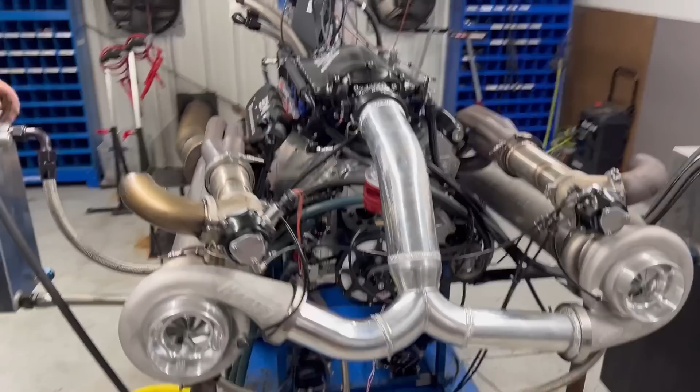We are here with a pretty decent, in fact probably as good an LS engine as we're gonna do, and as you're pretty much gonna find when it's water jacketed, cast block, cast cylinder head, so cast aluminum. Kyle is working on this thing and he's done the hot side, cold side for this. So we're going to use this as our SML setup and big horsepower LS setups.

This particular engine is for Alex Szabo, and Alex has actually bought an SML from us too. So this is going to be like the starter engine for him, and then we're going to put the same system on for his SML as we get that thing all the way through the process.

So Kyle, why don't you tell us what we got going on here? Basically, like he said, cast block, cast head, nothing super fancy billet on it like it is on the SML that he ordered. But as far as LS stuff goes, it is pretty bad.

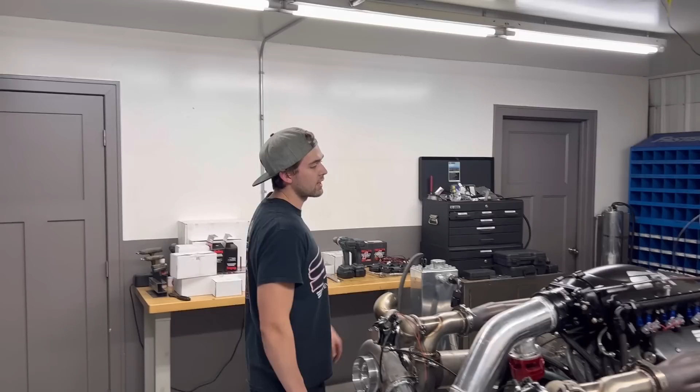So it's All Pro LS7 cylinder heads, LSR block, Callies crankshaft, all our super really bad boy go fast parts on it. Obviously billet intake, billet covers, and turbos, twin 76s I believe they are. Yeah, ball bearing, really nice turbos.

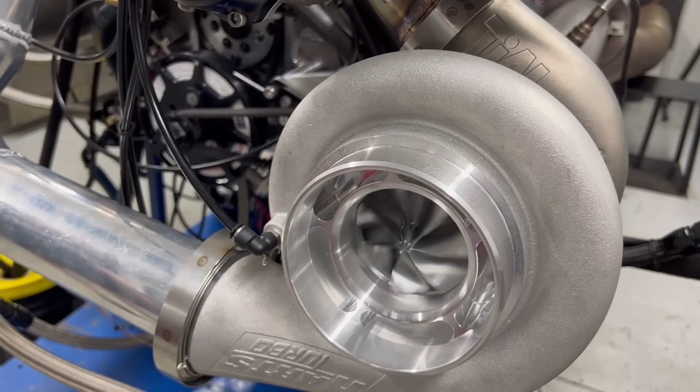This is kind of like, I think they make another super cheater version, like a super good version of this one. I don't think these are the super billet bad boy cheaters, just the medium cheaters.

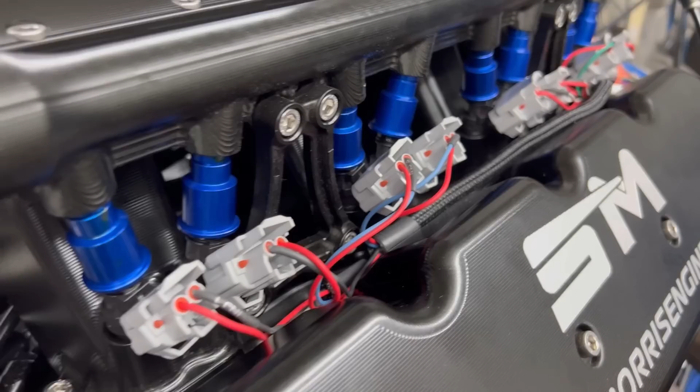Nice turbo anyways. So we're running it on a Holley Dominator today on the dyno, and I just did all our initial startup stuff with wiring, wiring up the second set of injectors, doing all our hot side, cold side stuff, hooked up all oil, all the fuel.

What kind of fuel is it on? Methanol. It's a methanol engine. But this will be a drag and drive type deal as it has water and everything like that, so he's going to do a little bit of street driving on this engine as well.

What kind of oil system is it? That's a Dailey billet dry sump, so you can't really see it unless you get right under there. So Dailey billet pan and oil pump setup.

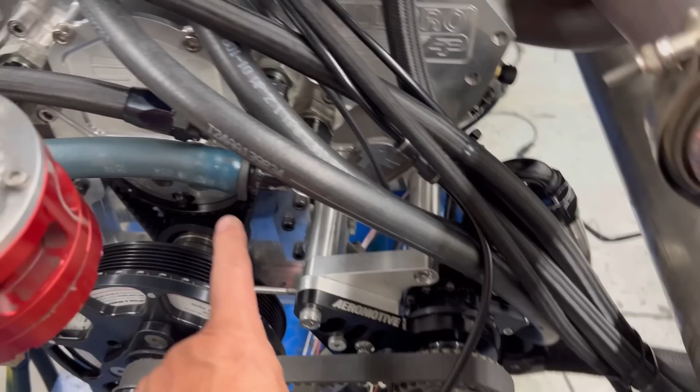And as you can see here, we also have our fuel pump drive, cam sync, and oil pump setup, which is going to be real similar, the same as what it is on our SML stuff. So drag and drive, you'll be able to just take the belt off of the fuel pump, run it through gasoline.

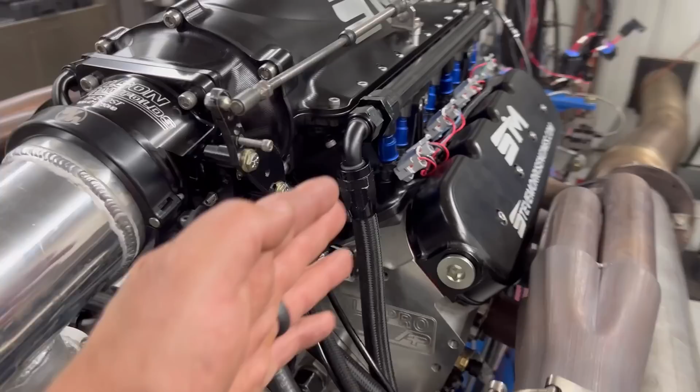Especially with this style injector, these are the 2150 FIC 2150s. Now on 90 psi fuel pressure, these things flow 300, I believe 295, 300 pounds per hour each. So ample for what we're going to be doing with this particular project.

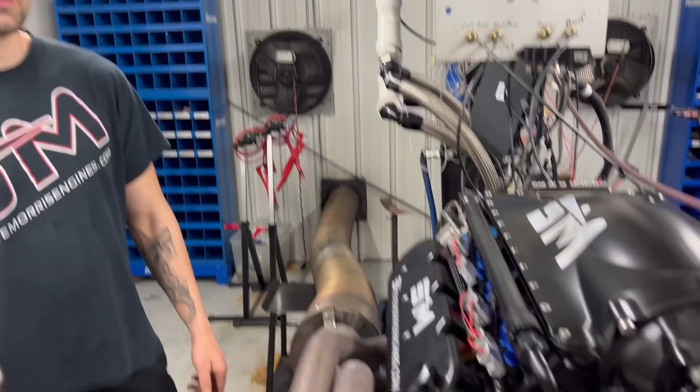Cylinder head, all pro LS7s, just usual Inconel valves, titanium valves. Titanium intake, Inconel exhaust. It's on an all pro 12-4 head, I believe these ones are. Jesel rocker system on this.

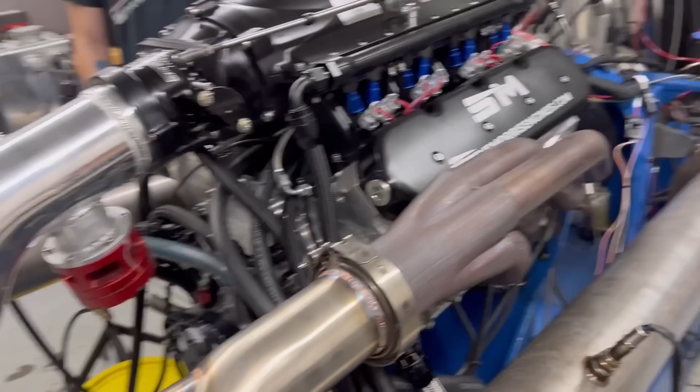Normal deal through there. These are, like I said, everything hot side, cold side is all ours, but these are Alex's turbos. Obviously you can see the Dailey dry sump, and that's the dry sump tank, that's just our dyno tank that we use here.

And oh, what else we got? Coil on plug. That is pretty much about it.

So Kyle's already run through the startup and warm up. Let's see here, and we can do... We actually have set up a temporary timing pointer so you could check timing on it. This still has, this is the crank trigger, so you're gonna have to check timing on it, because this is an external crank trigger, not using the internal crank trigger.

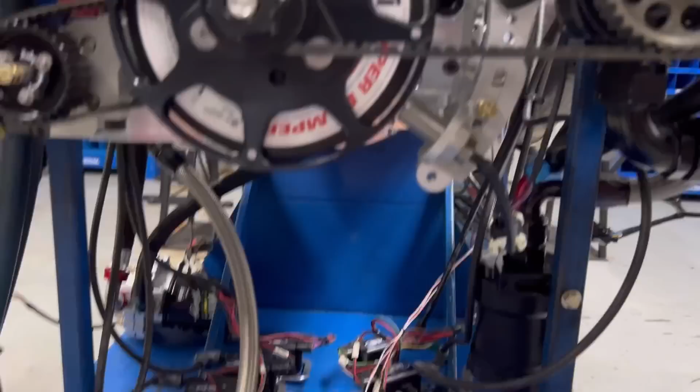And this is going to be the way it'll be on the SMLs, although you can use a 58 tooth wheel. I do have a sensor location in the block, but in general we're going to run these because I do like them better, and they do work better with a cam sync setup. So I'm going to turn this thing over and let Kyle take it from here.

All right, so getting ready to set our static timing on this, to see where we got our crank trigger at. I already got a pretty good baseline on it, should be right around 60 degrees for our reference angle. But just gonna clip that on our number one spark plug, arrow facing towards the spark plug, and we're gonna go check it out.

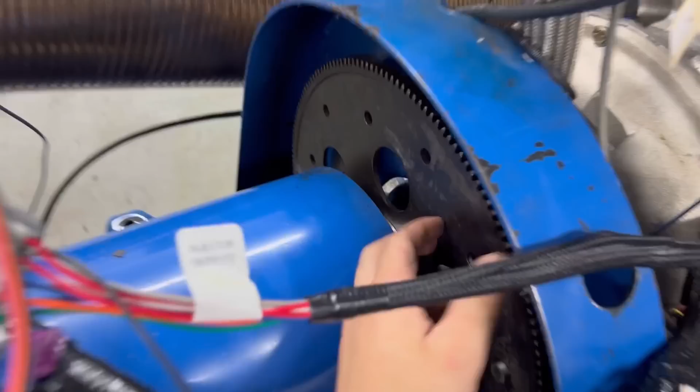Another thing we get a lot of comments on every once in a while when we're doing these videos is people comment about the clunking they sometimes hear, or like a little bit of rattle. That's actually the dyno itself. You can see the way we have it set up, it's actually got clutch springs in there. So those will oftentimes rattle a lot, especially when it's idling real low, or if it's really lopey, then you'll hear that thing rattling. But just something I wanted to address.

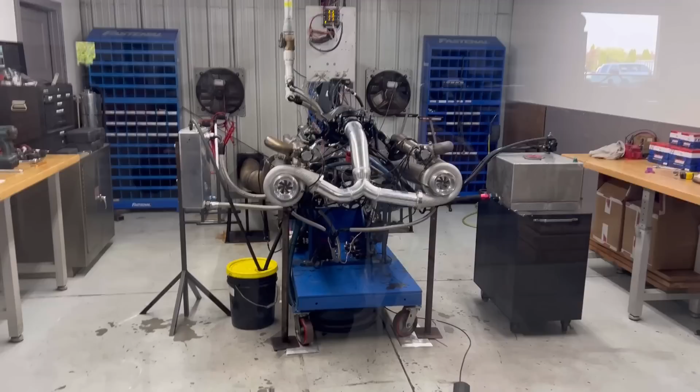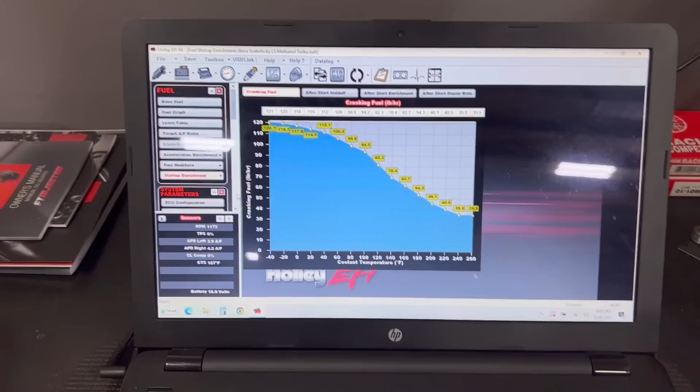All right, so we got the static timing all checked out, timing's where it needs to be. I got a pretty good idea of where this thing needs to be for cranking fuel in order to start good, so I've got it set up here. I got my V table, my pound hour table looking good, basically how it's supposed to look. So I think we're gonna take a little try on it here. Set this on the tripod.

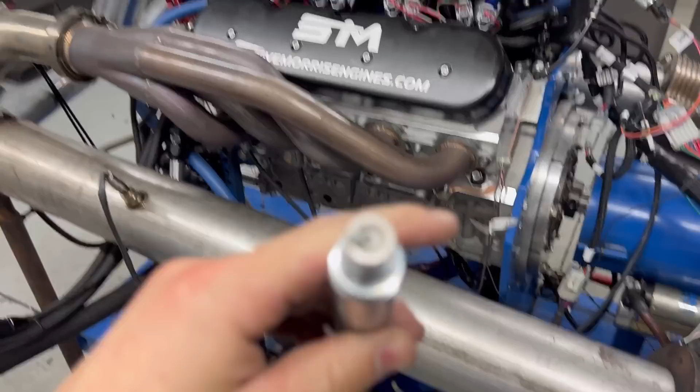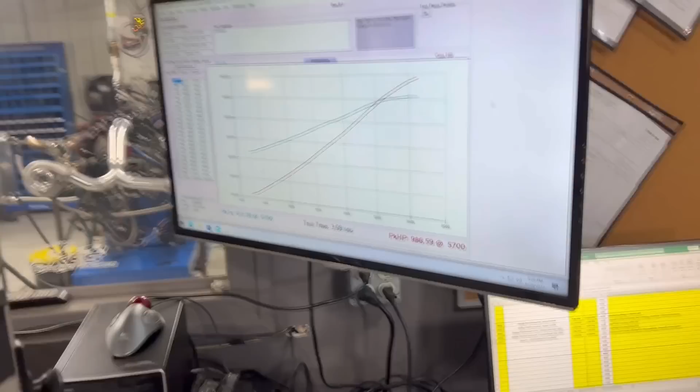All right, so just pulled the plugs off of that pass. Plenty, let's see if you can see it there. Plenty safe, plenty rich still. Come on, there you go. So I'll go show you. I mean, 6 pounds of boost on a 427 cubic inch LS, just under 1,000 horsepower, so we're gonna keep creeping up on it still.

All right, so yesterday we made a couple of hits on it. Just made a little bit over 1,700 horsepower on the final pull yesterday. So now that I've got some heat in it, I'm gonna go ahead and do a cylinder head retorque on this whole thing, and we're gonna start leaning on it.

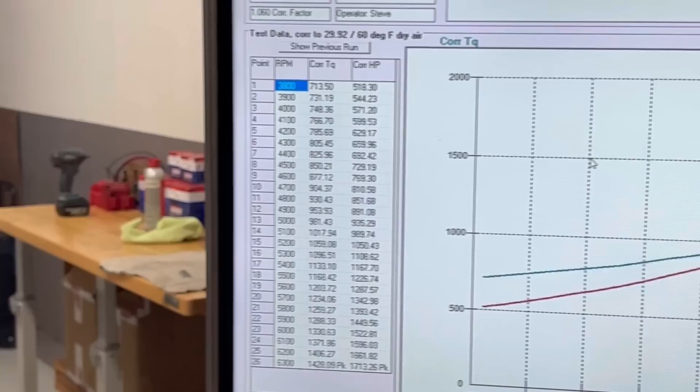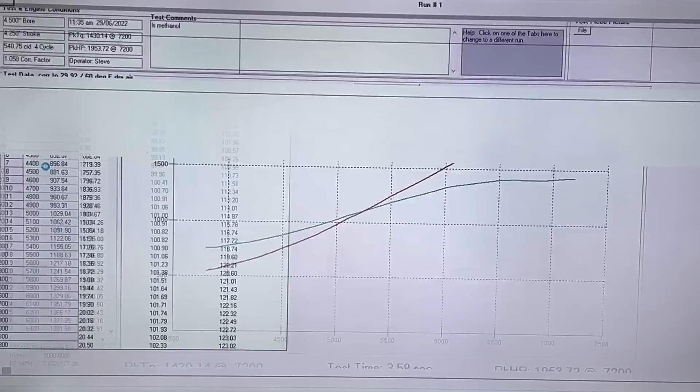All right, so that one sounded pretty good, let's see what it made. 1953, just under 2,000. We're still like way late on boost, way late on timing. Still fat rich, so we're gonna keep sneaking up on it here. I'll show you guys how much it made for boost. So 20 pounds of boost, but like I said, with no timing, for the horsepower we're going for, that's still way low. Oil pressure is all looking good.

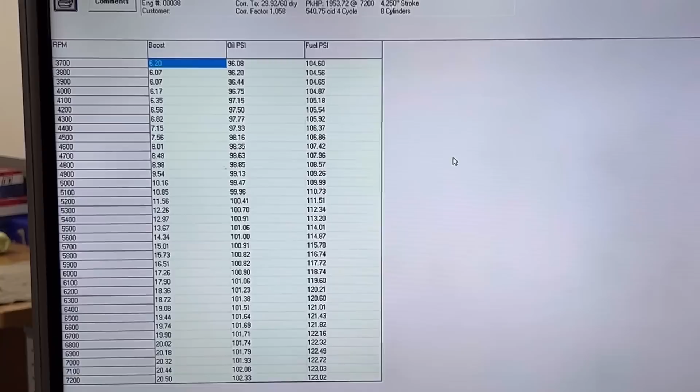Fuel pressure is looking good. I think we're gonna take a look at some plugs, take a look at the data, and then I'll get back with you guys.

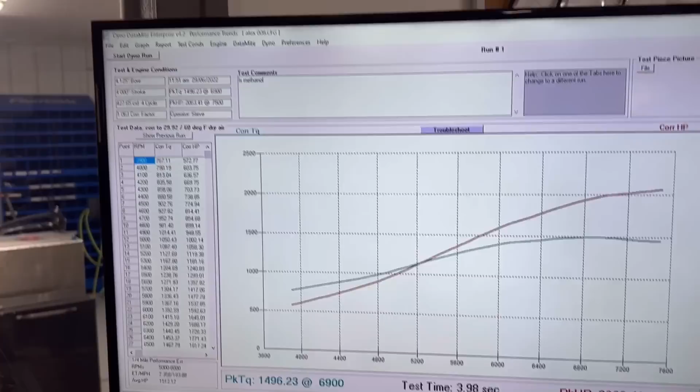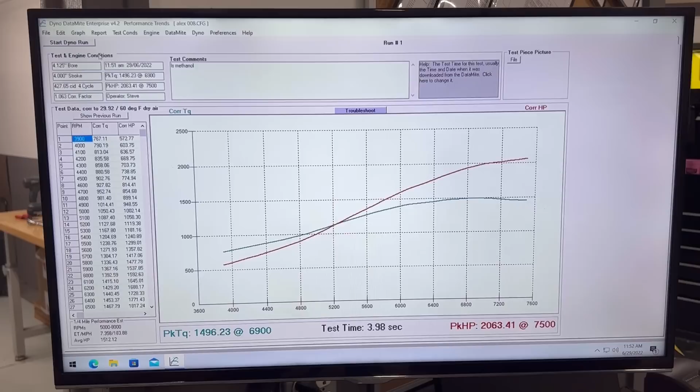Pretty sweet. This is where I come in and say, oh, what's going on? That looks good. Where you at for boost and stuff? Yeah, a couple more pounds in it this time around, but I took more timing out of it, like you said. So, oops. Yeah. 22 pounds of boost. Dang.

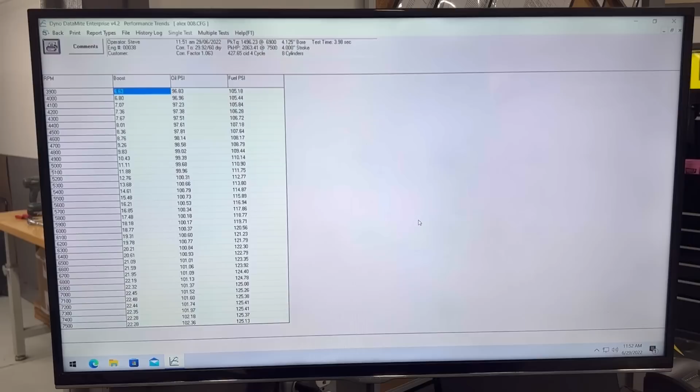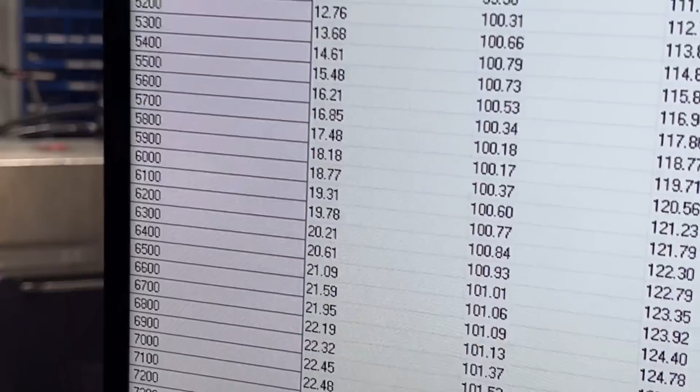That's pretty good. Yeah, that's pretty good. Let's see up closer here. 22. Oil pressure is looking sweet, everything's good there, fuel pressure is right. All right.

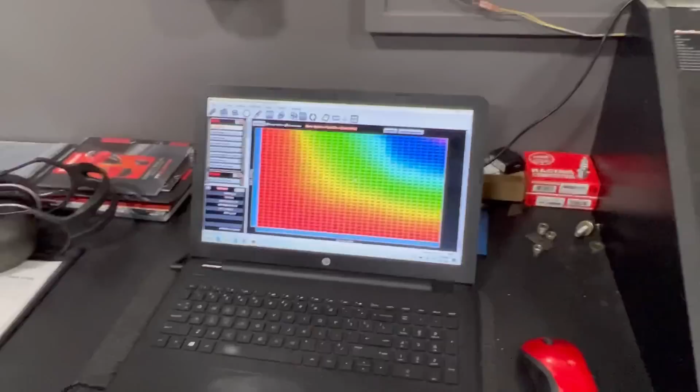I'm gonna bring up your data log and look at that. So we'll lean on this a little bit harder because obviously 22 pounds of boost is nothing. Those are some pretty good turbos, I think. Better in this chair.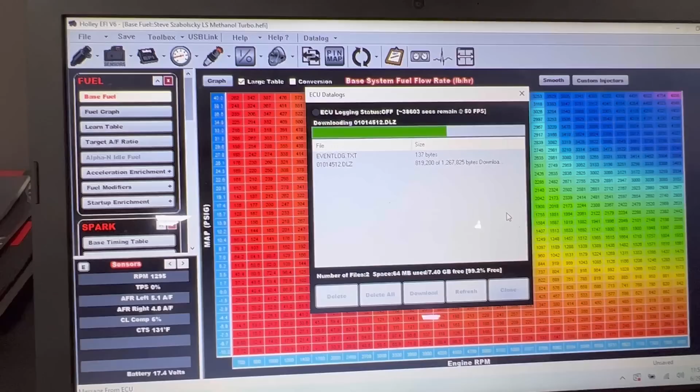Wait for that to download. You've been showing much of the stuff there? Not on the data log side of things, I haven't. No? Was that shaking? Yeah.

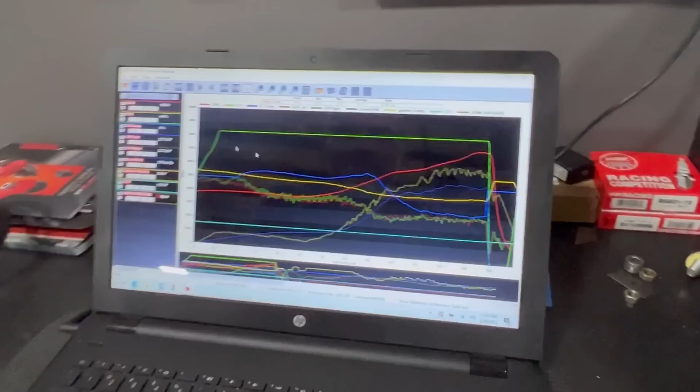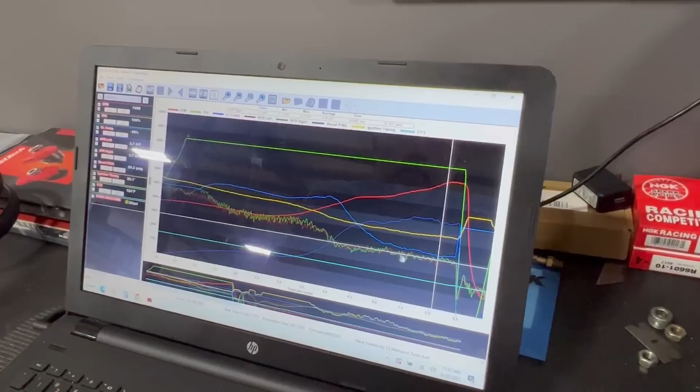Taking some fuel away out there at the high end. Rich. What is, oh, dome pressure. The O2s are nice and tight, that looks good.

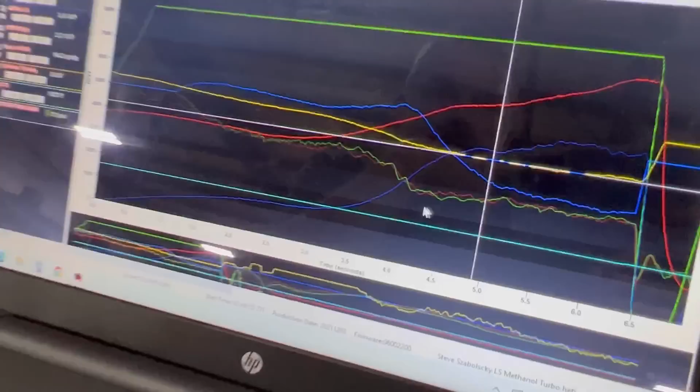Smooth those out just a little bit more, but yeah, that's a nice tight looking O2. Looks good. It's taking, this is the blue line, is the O2 correction, so it's taking fuel out of it right here. And where's our boost? Is the dark blue line right here, and it's kind of jerking around up there a little bit.

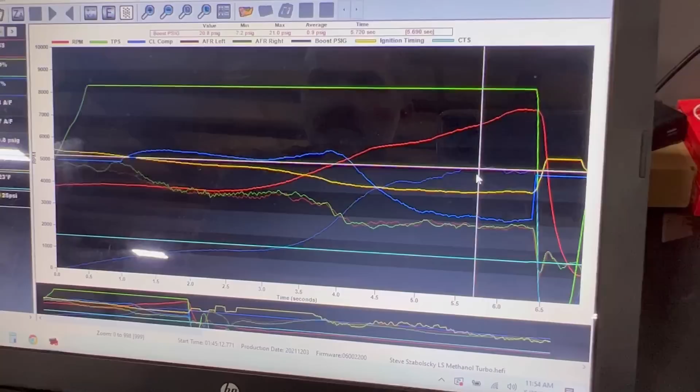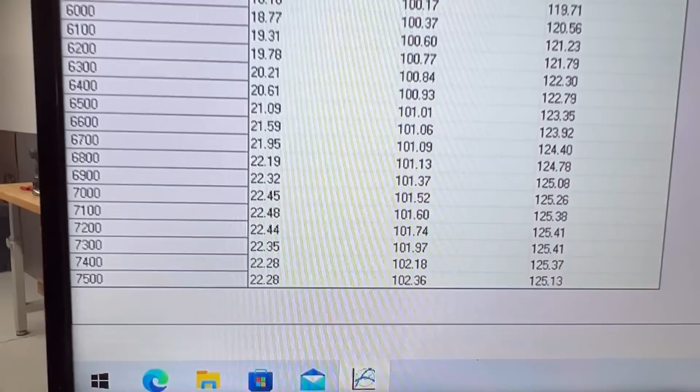It's actually only 20 here. The dyno says it's a little bit high. Yep, 20 compared to 22.

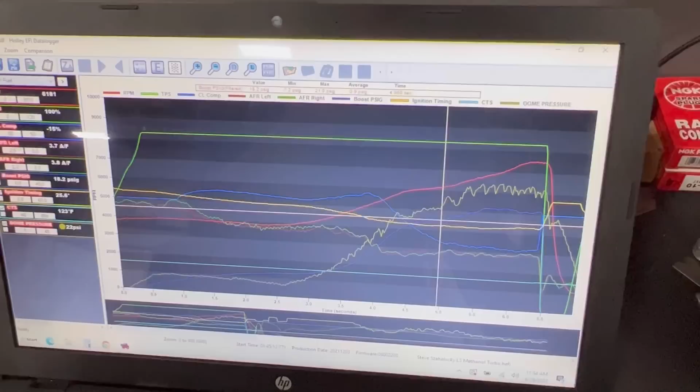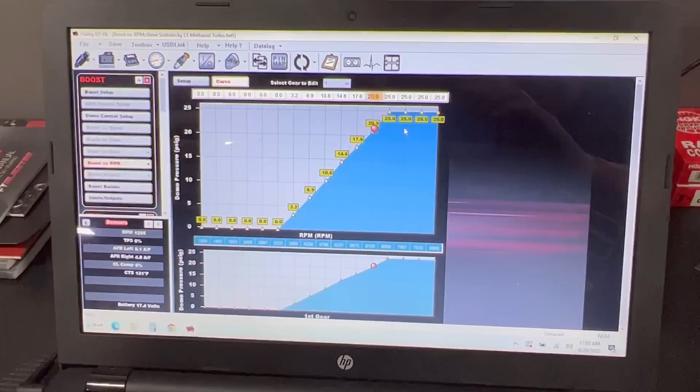Dome pressure is really jerking around here too, so it's not smooth, and it really should be. We'll go over here and look at your dome pressure setting. Must be something in the PID. You got 50 psi, 30 RPM per second. That's not nearly as smooth as it should be. I can't remember, but I think there's a different PID here for controlling that that'll be a little smoother.

Yeah, so I would mess with that, but definitely looking real good, and that's sweet, so just continue on. So we already retorqued, relashed, everything's all set there. Yeah, we can do a plug read and lean on it a little bit more.

Alright, so just a couple more pounds on the dome is all I did to it, and left the timing pretty much alone, because as it makes more boost, I already have it set up so that it's going to have less timing in it. It's just the way I set the graph up.

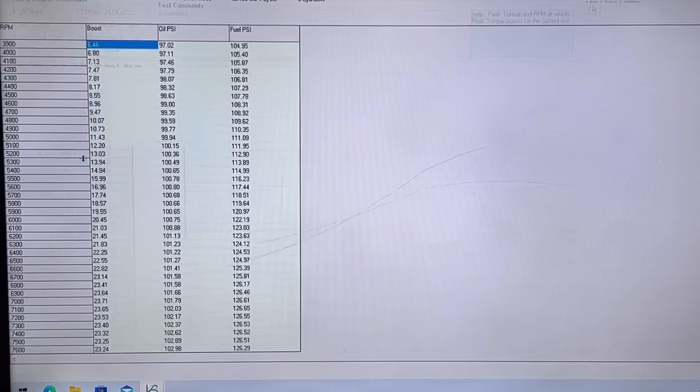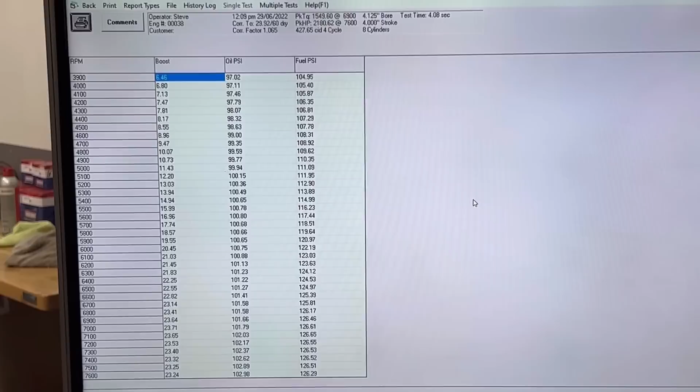So 2180, man, we're almost to our goal already. Let's pull up our boost numbers here. Oh yeah, see, according to the dyno, still only 23 pounds of boost. Oil pressure looks awesome, fuel pressure looks awesome. So I'll show you guys the data log here. I'll take this thing off the shop pod.

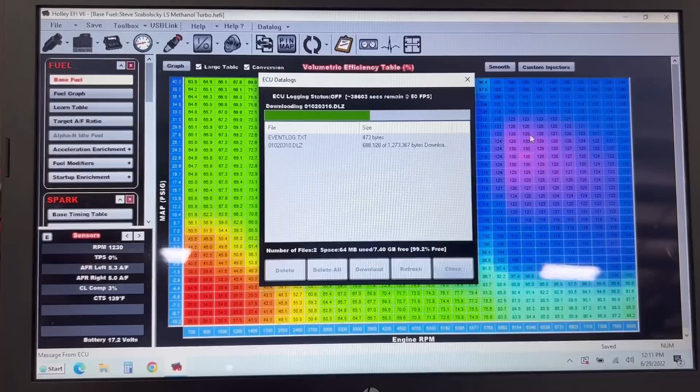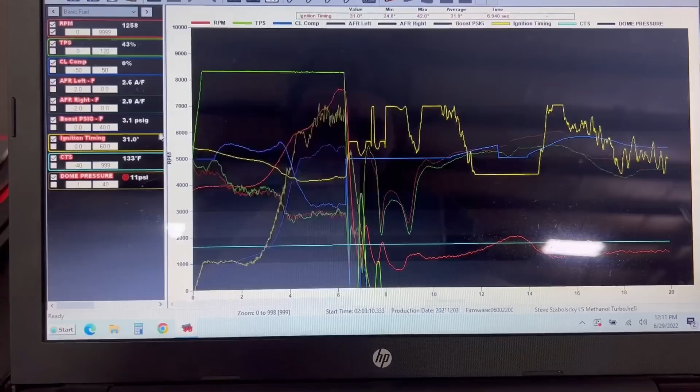Our dome pressure is still doing something funny up there, going back and forth. I did screw around with the D term, and I gave it a number there. So I'll go back and compare these logs and see if that actually did anything or made it better.

Let's see here. Yeah, it is affecting our boost too, but 22 pounds of boost. Like I said before, the dyno is reading just a smidge higher than what it is on the actual data log, and I'll trust this data log more than I trust the actual dyno, to be honest with you. But let's see here.

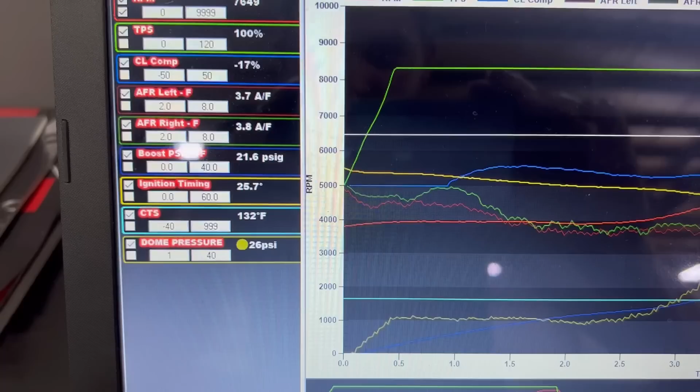Yeah, out here where it's making all that power, we're only at 25.7 degrees of timing. It's still pulling a little bit of fuel out there, so I'll be sure to go back and correct that in our VE table. Yeah, it's still pulling. Let's see. 3.7 on our AFR, so looking good there.

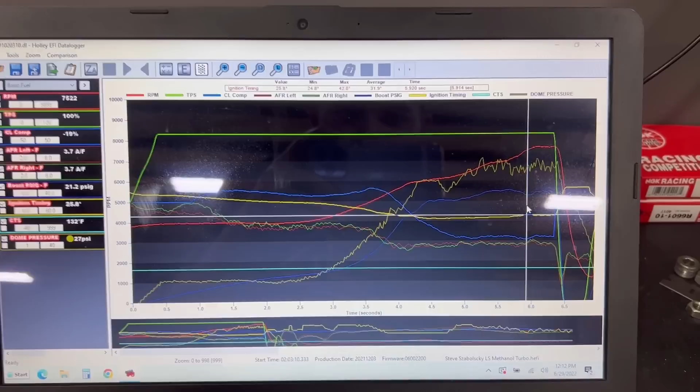So I'll go make a couple more changes and then make another hit on it. Alright guys, here we are. Hopefully this will be the final pull. Looking for like 2,300 or so. We'll be like 2,500 plus once it's actually in the car, but there's no point in trying to just chase a number on the dyno. So here we go.

Sounded pretty good. Just tagged the rev limiter out there, just a little bit. Oh yeah, there's our number. Yep, 2368 at 8,000 RPM.

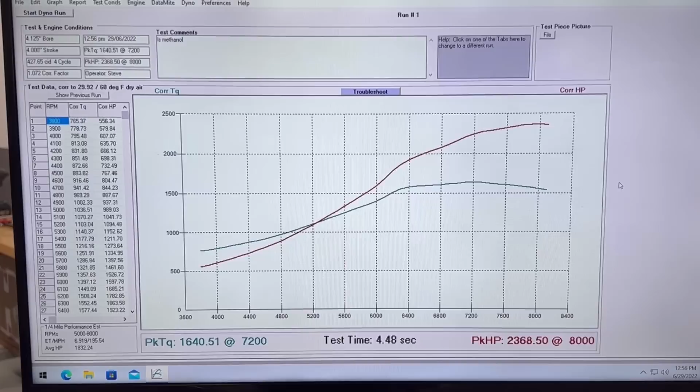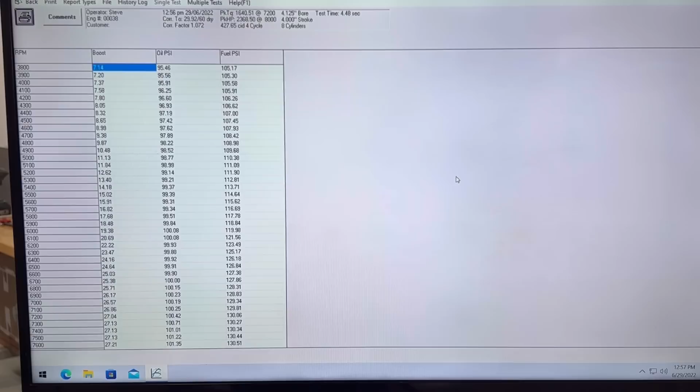Let's take a look at our boost here. Yep. Whoops. So you can see the dyno says it made 27 pounds of boost. Oil pressure looks good, fuel pressure looks good, as it has been through all of today pretty much. But let's go download that data log and look at that real quick.

Yeah, I think Alex is going to be pretty happy with this thing. It's making a lot of power for, you know, just that much boost.

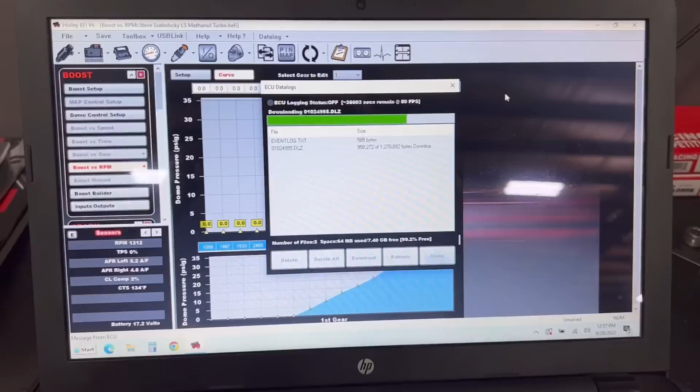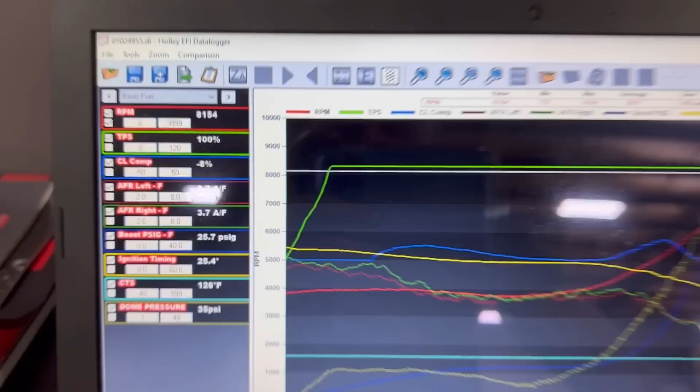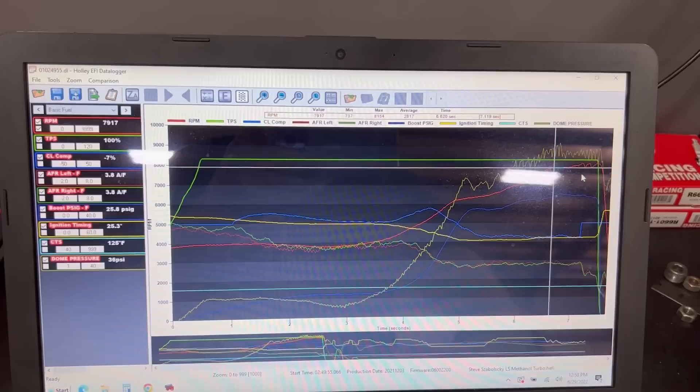Let's see, just tagged rev limiter out there. 26 pounds of boost. Closed loop comp is looking all right. Probably take a little bit more fuel out of it here in the VE table, but dome pressure is still pulsating out there a little bit. It doesn't seem to be too much of a big deal. I'd like to eventually figure that out.

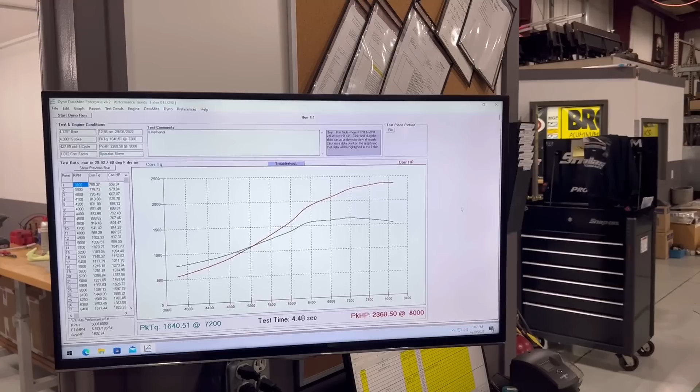But everything's looking pretty good. I'm gonna go pull a plug and I think we'll call it a day. Where are you at? Let's see where you're at. That's good, that's good power. I heard you put it on the rev limiter on there, so obviously the rev limiter is set at 8,000 or just below. So, but that looks good.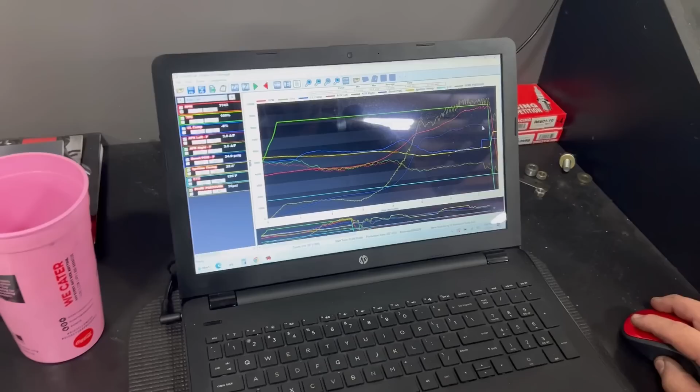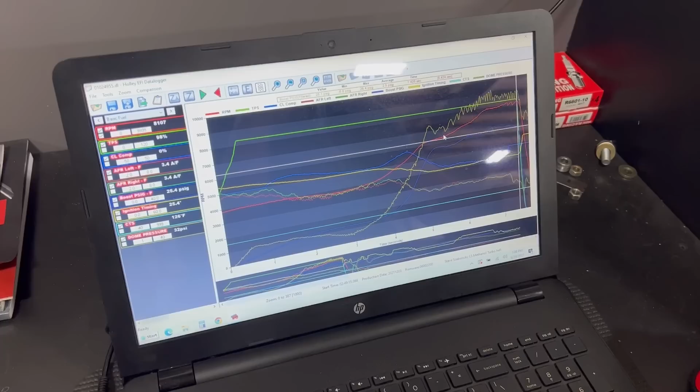How many pounds of boost? What's everything look like? So that is at 25 pounds of boost. Dang. So we're starting to put more pressure on the wastegate. But there's definitely more left in it. If we wanted to lean on this particular combination harder, those turbos are still good for more horsepower. Exactly how much, I don't know.

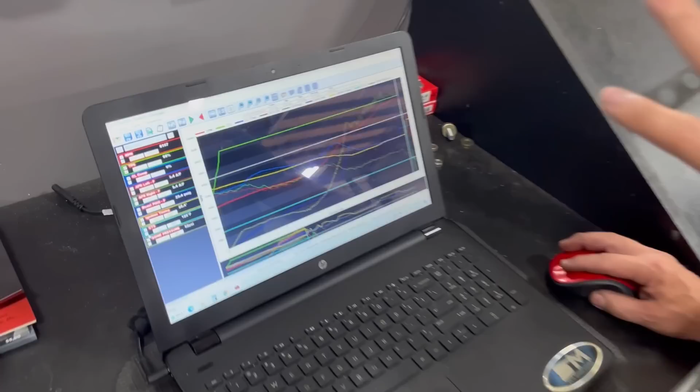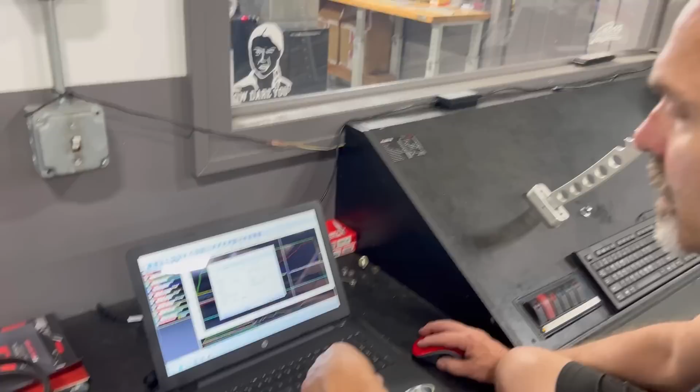But we're at where he wants to be. I think that this is pretty nice. The O2 looks nice, the correction's right good on the money. Everything's within less than 10%. Air fuel ratios look great. Oil pressure's good. Everything looks right dead in line of what it should be. I think it's pretty good.

We're gonna have, now Kyle's gonna finish this up by converting it over to gas, and then he'll just work on a simple starter street tune, because street tunes always have to be done in the car. It's really hard to simulate all the little pedal positions and whatnot. But he'll still put it on pump gas and do that tune up for it. And this race gas tune up is pretty sweet. I think there's probably more at it, but we're not accomplishing a lot by just leaning on it. We can actually be doing this better in the car, especially when we're building the bigger, badder, better piece after this. So I think it's really good. Good job, Kyle.